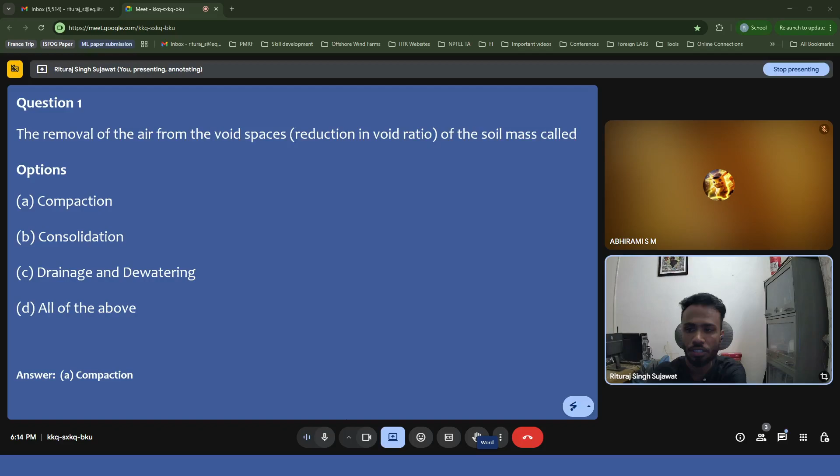This is the second question in front of you. If you don't have anything to discuss concerning the first question, let's start with the second question. Due to the compaction of the soil, which particular process is associated?

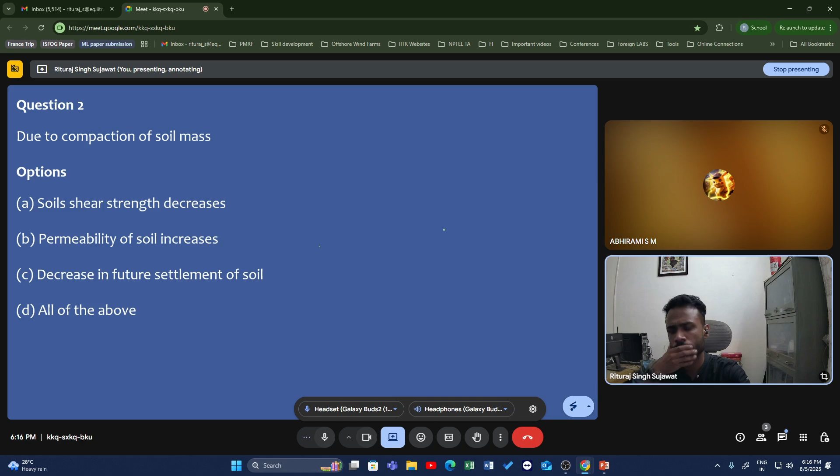So let's check the answer. The answer is C, that is, the decrease in the future settlement of the soil. Let's see how it works. When you have a particular soil matrix, due to the compaction of the soil, you can observe there is a removal of the air voids from the soil matrix. So you can see there is a compression in the soil.

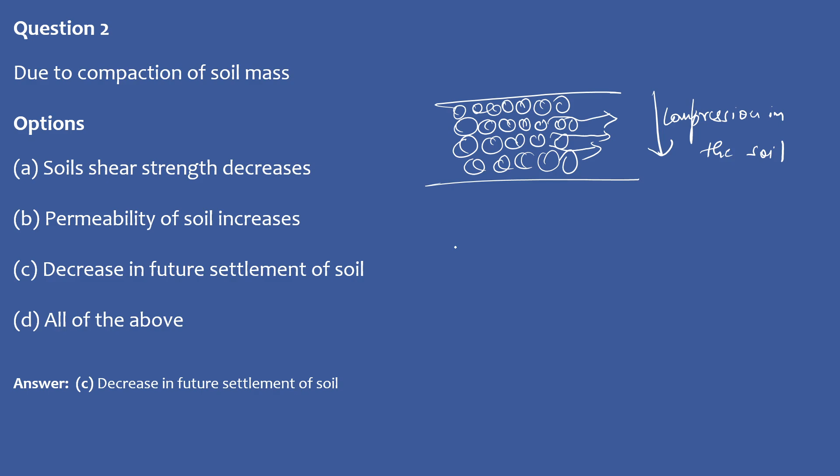Due to that compaction, whatever settlement needed to occur, the maximum of it has already happened. So you can observe there is a decrease in the future settlement of the soil, because whatever settlement was about to happen has already happened. So the correct answer is C, which is decrease in the future settlement of the soil.

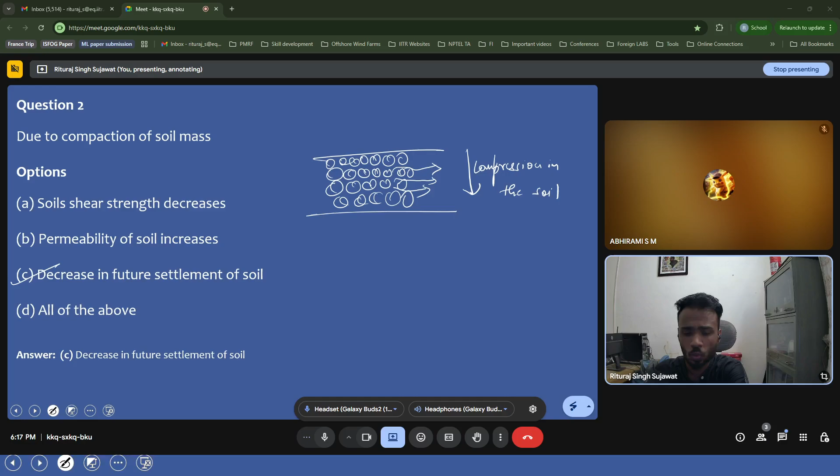Saturation is the essential condition for... So any doubt with question number 2? If not, then we can move to question number 3, which is: saturation is the essential condition for which of the given options.

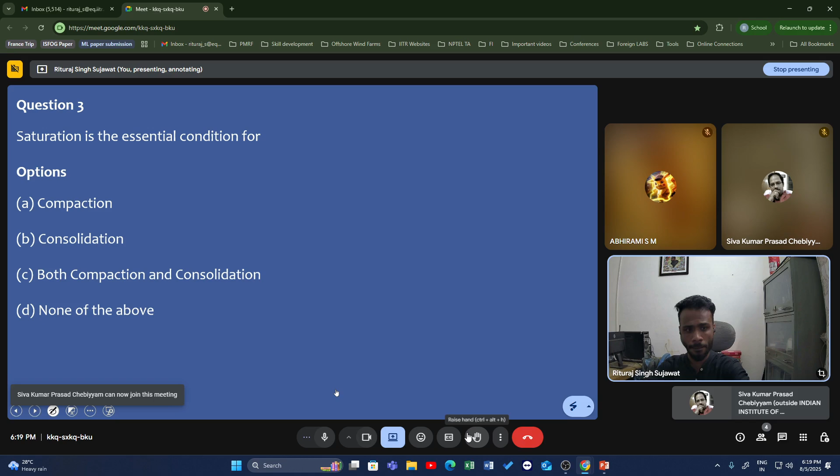So there is a question on the screen right now. You need to select one of the probable options. The question is, saturation is the essential condition for which particular phenomenon.

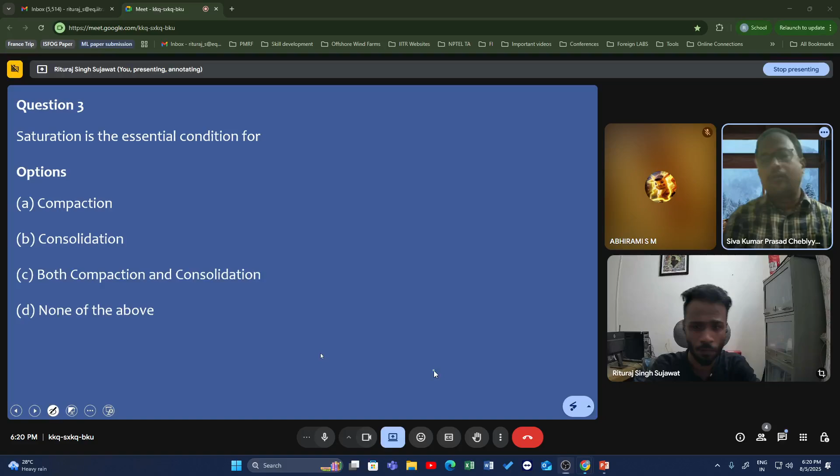So let's check the answer. Among all those four options, usually for compaction you don't require your soil to be saturated. Even if the soil is totally dry, you can go for the compaction process. But when there is water available in the voids, it corresponds to the consolidation phenomenon, which is basically the removal of the excess pore water pressure. So B, consolidation, is the answer.

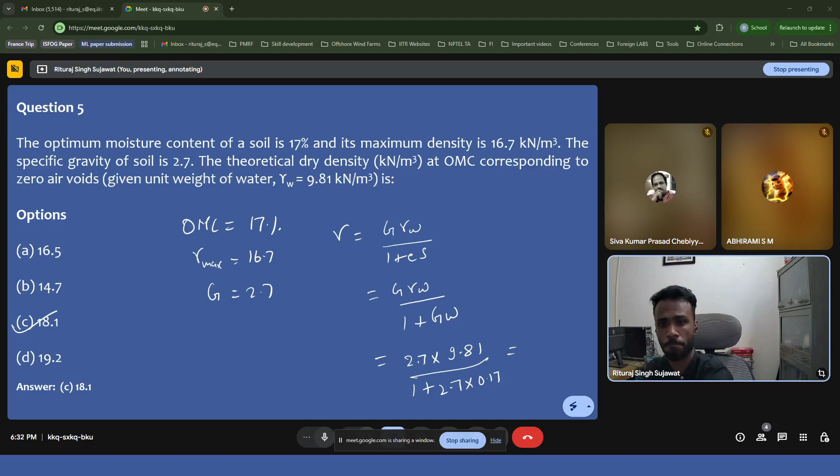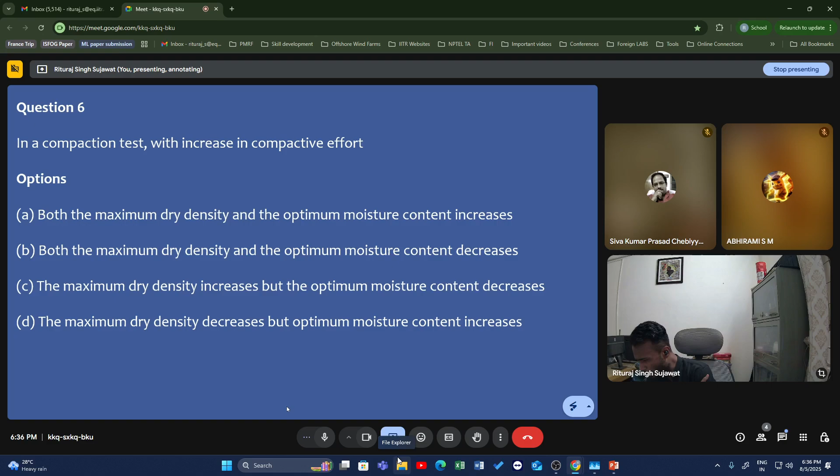So let's check the answer. Yeah, so the correct answer is option C. So let's see how it's working. So usually if we see the plot where we need to analyze how much compacting effort we need to make, on one axis you have the dry unit weight, and then you have 10, 12, 14, that will go up to 24. Okay, so this one is your optimum moisture content.

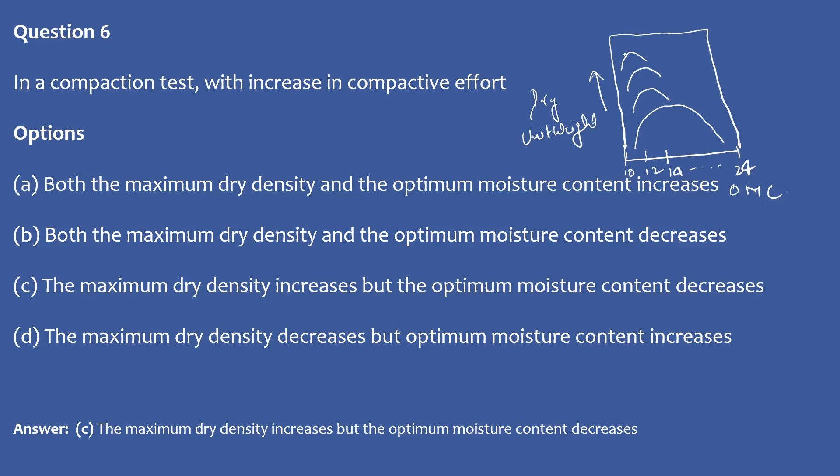So if we see, usually the plot between the dry unit weight and the moisture content is an inverse parabola, this inverse cup-shaped profile. So as you move upwards with the dry unit weight, you will see your compacting effort increases. As your soil becomes dense, that's how the nature of dry unit weight versus OMC will look. So you will observe that here there is an increase in the compacting effort because your soil is becoming more dense.

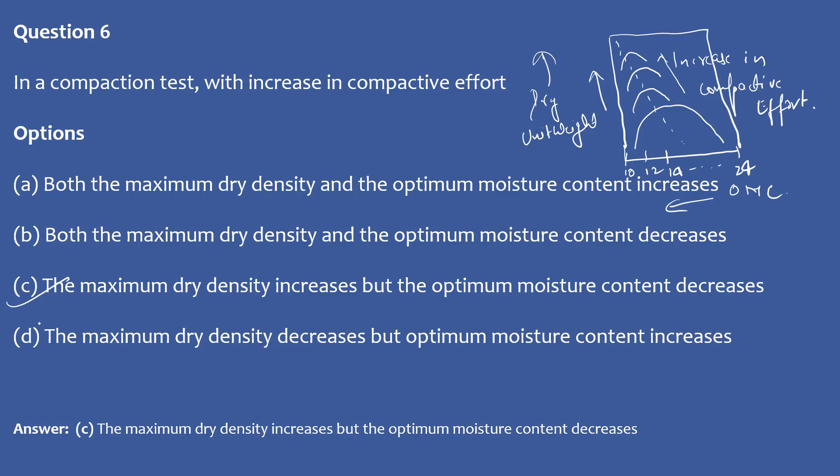So in this particular case, what we are basically observing is that with the increase in the compacting effort, your dry unit weight is increasing, but at the same time your optimum moisture content is decreasing, right? So that is how things are happening. So which option represents this trend? The maximum dry density increases but the optimum moisture content decreases. So option C corresponds to the correct answer.

Let's move to the next question. So question number 7. By the way, any doubt in this? Yeah, if not, then let's move to question number 7. So we have four different geomaterials which are compacted at the same compacting effort in the field. Which will represent the correct sequence in the increasing order of their maximum dry density?

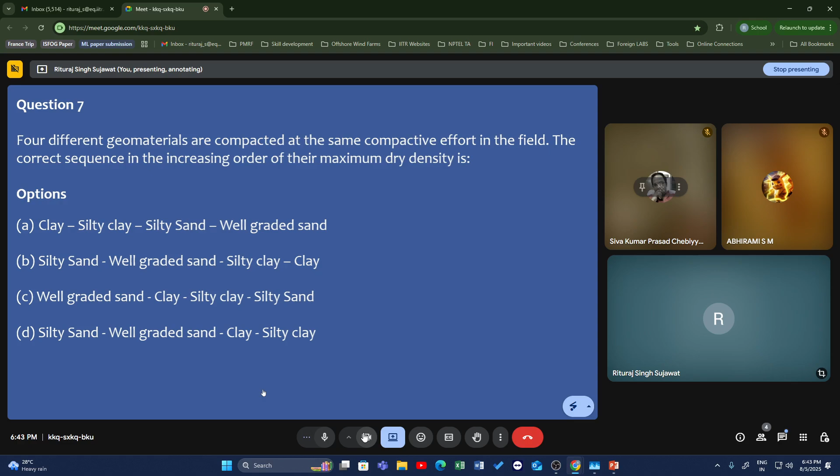Yeah, so let's check the answer. So the correct option is A. So let's check what you guys have given. Yeah. So yes. So let's check how it is.

So if we check all the four options, we have four types of geological material available with us. First is the clay, then you have a silty clay, then you have a silty sand, then you have a well graded sand.

So among all these four options, we can see that the well graded sand will have the densest packing, and that's why it will correspond to the higher maximum density. The next material is the silty sand; since you have a silt content, you can expect lower density as compared to the well graded sand,

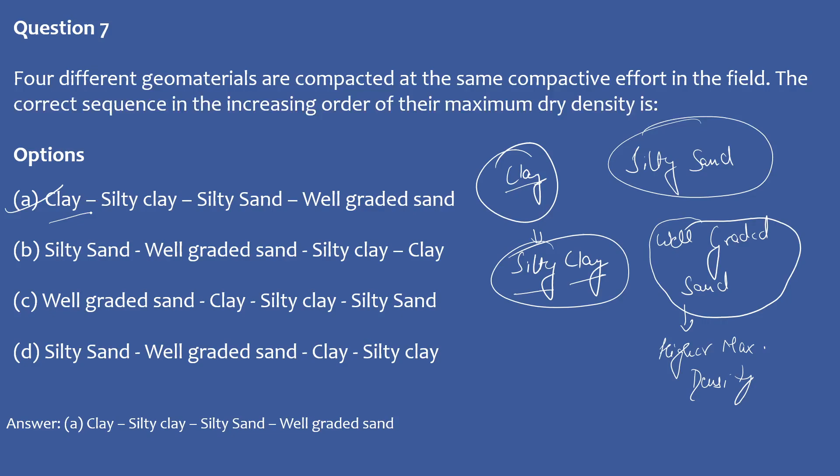So some of you have given this answer correct. So yeah, it's intuitive. So any discussion you guys want to have on this? If not, then let's move to the next question.

So you have been given four types of tests, and you need to determine which parameter each of those four tests corresponds to, whether it's penetration index, stiffness, moisture content, or density, and how they are linked with each other.

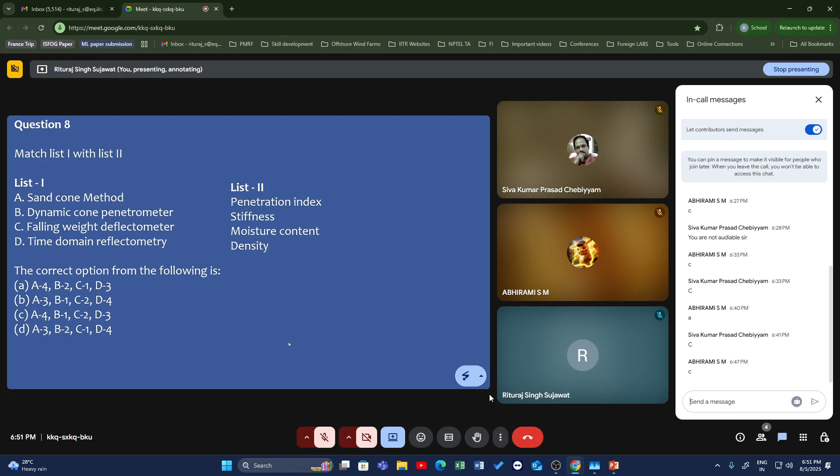Let's check the answer. Yeah, so the correct answer is option C.

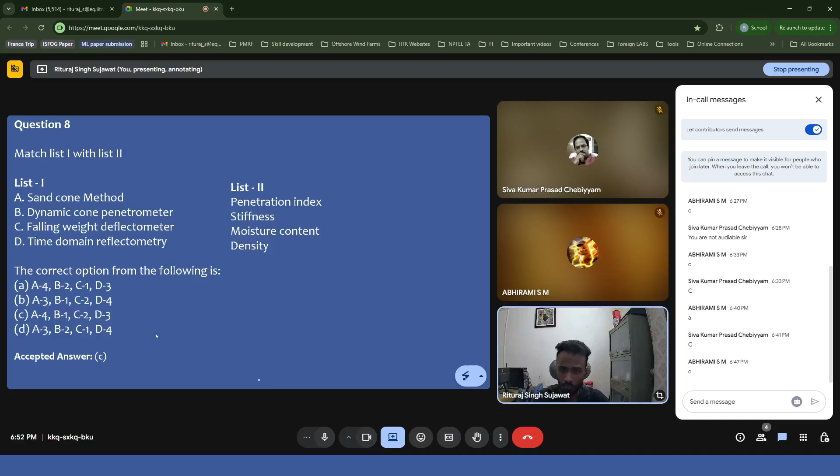Okay, I think it again got stuck.

Yeah, so the correct answer is option C. So let's check. The sand cone method is a very popular method to evaluate the in situ density of the soil. Usually you have a certain setup, and you take a known weight of sand sample in that particular flask, and then you take it to the site,

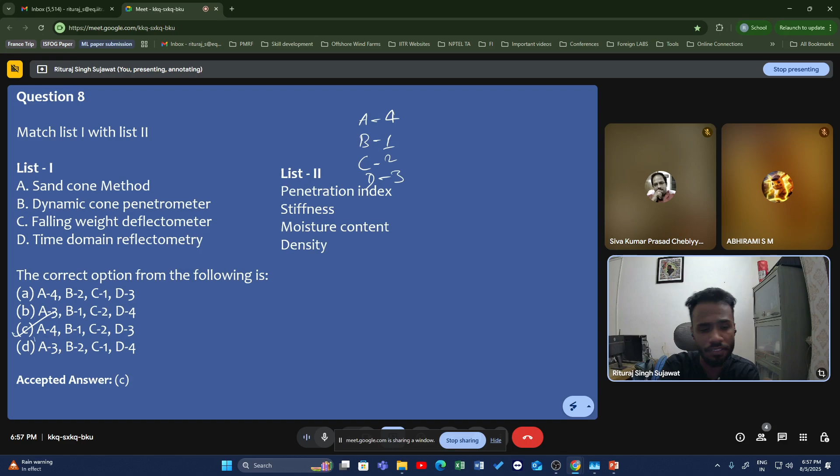Any doubt in this? You can check each and every method one by one. Some of them are widely used, and time domain reflectometry is based on the wave reflection phenomenon, where you allow a wave to pass through a particular soil medium, you calculate how much time is required to cover a particular length, then using that you calculate the velocity, and then you relate that velocity back to the dielectric constant of the soil, which will give you the moisture content.

So moving to question number 9, this is there in front of you. Soil has been compacted at the dry side of the optimum moisture content as compared to the wet side of the OMC. So you are having soil which is one at the dry side of OMC and one at the wet side of the OMC. So how will you relate the dry side and the wet side of the OMC with the shear strength?

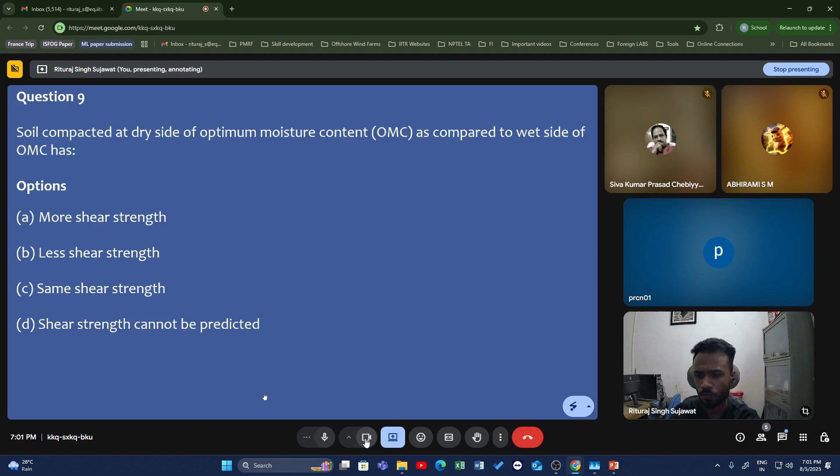Let's check the answer for this. So if we check, soil compacted at the dry side of the OMC as compared to the wet side of the OMC is having more shear strength. So you are having a dry density, and then there is an optimum moisture content. So if you take the plot of this, here basically your optimum moisture content lies.

So here is the moisture content. So this is your OMC. Here you will be having the wet side, and here you will be having the dry side. So definitely at the dry side you will be having less moisture available in the soil. At the dry side, you are having less water content available, and that will correspond to higher internal friction in the soil particles, and that's why it will lead to more shear strength.

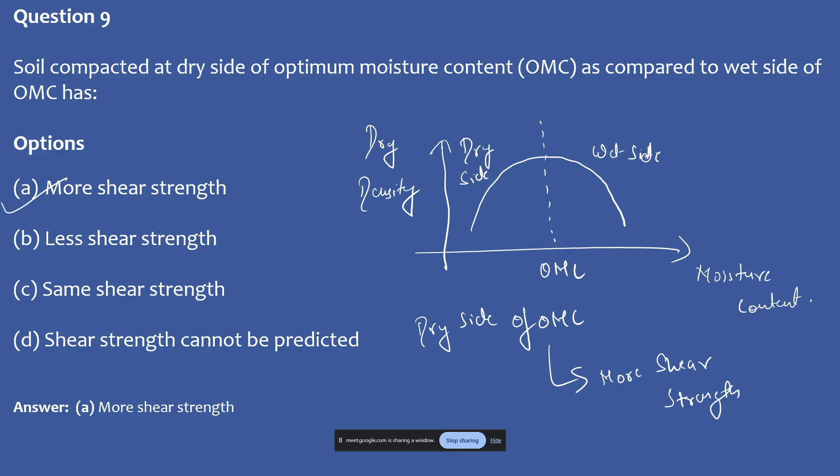Okay, then let's move to question number 10. The in situ void ratio of a granular soil deposit is 0.5. The maximum and minimum void ratios of the soil are determined to be 0.75 and 0.35. GS is 2.67, gamma W is 9.81 kN per meter cube. What is the relative compaction of the deposit? So the in situ void ratio, maximum and minimum void ratios, GS and gamma W are given to you.

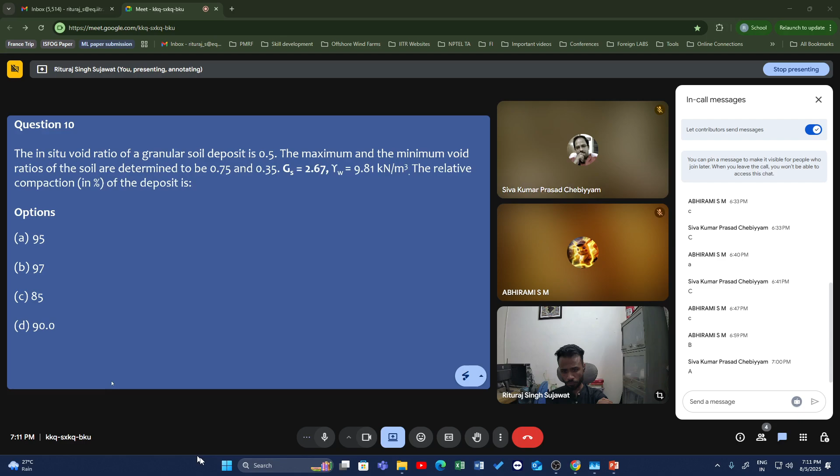So do we have any answers? Okay. Let's check the answer. So the correct answer is option D. Let's check with this. The in situ void ratio is 0.5. Your maximum void ratio is 0.75 and your minimum void ratio is 0.35. Your GS value is 2.67 and your gamma W is 9.81 kN per meter cube.

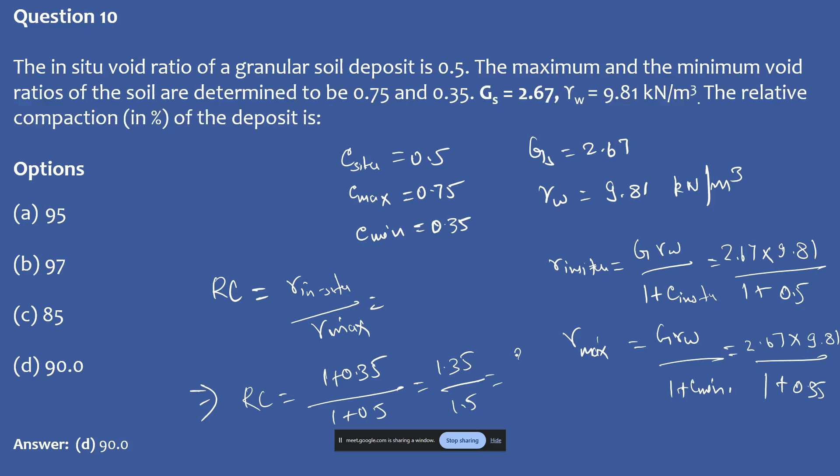So gamma in situ is G gamma W over 1 plus E in situ, and your gamma maximum corresponds to your E minimum. So 1 plus E minimum is 1.35 and your E in situ is 0.5. That's how you need to compare. So that will come out as 1.35 upon 1 plus 0.5, that is 1.35 to 1.5, which is 9 by 10, that is 0.9, basically 90%. So the correct answer is option D. The relative compaction of the deposit is 90%.

So that was the part. Any doubt in this, guys? So it's straightforward. You just need to know what the relative compaction formula is. So that's basically your ratio of the in situ density to your maximum density.

Your in situ density you can evaluate using G gamma W upon 1 plus E in situ, and your maximum density basically you evaluate using G gamma W upon 1 plus E minimum. You can take the ratio of both of them, and that will basically give you how much your relative compaction is, which is corresponding to your 90%. Any doubt in this, guys?

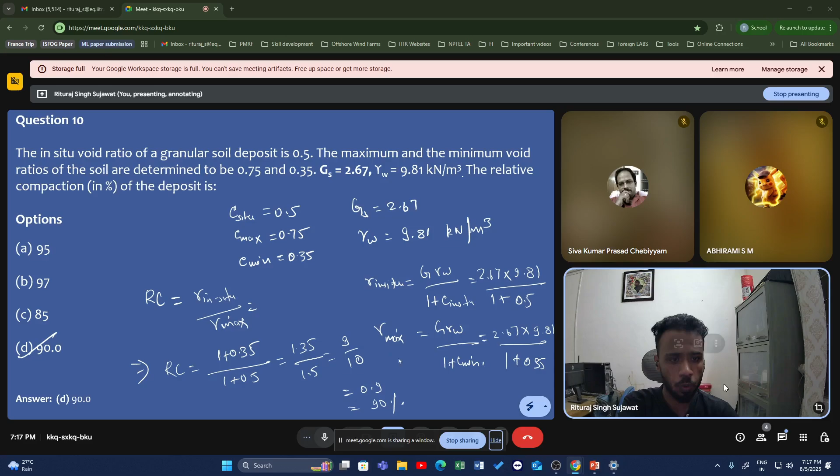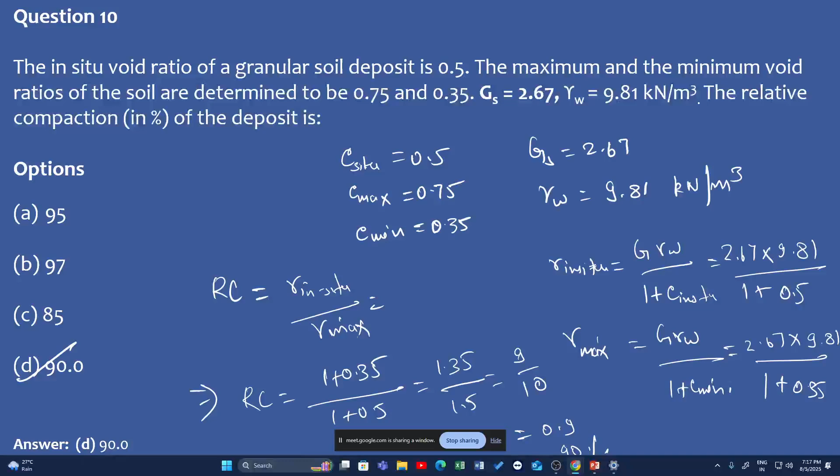So yeah, we did get some correct answers. Yeah, that was the gamma maximum. Thank you for pointing it out. And then let's move to question number 11 if you don't have any doubt in this. Yeah, so again that's a theoretical question in front of you. So where do we use the vibratory rollers for compacting?

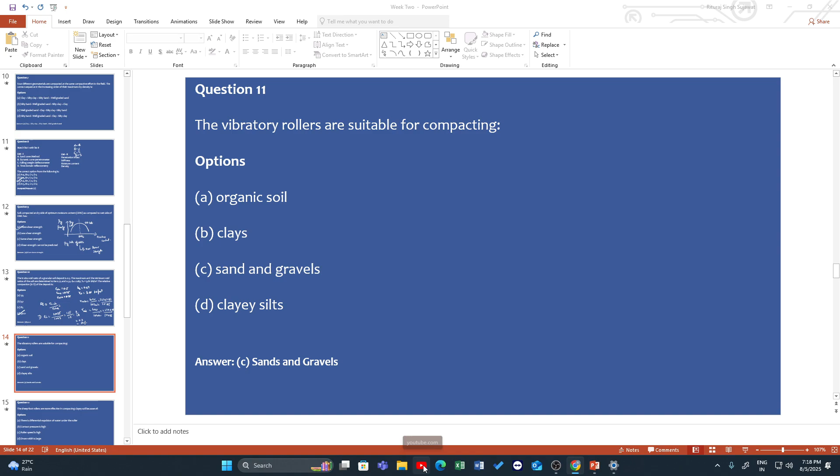So the vibratory rollers are suitable for compacting. So which type of soil will you suggest the vibratory rollers are used for?

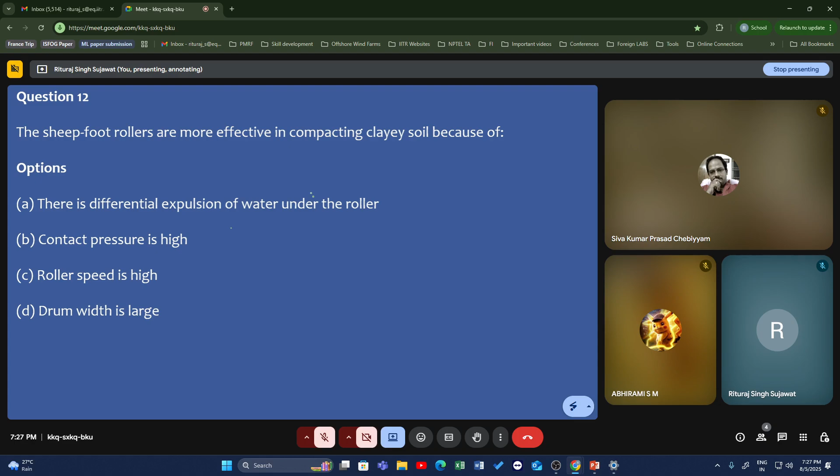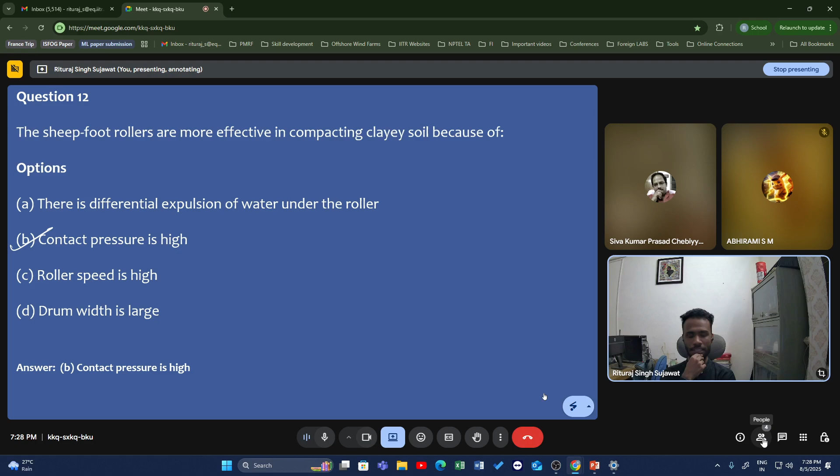So yeah, let's check the answer. So the correct answer is option B, which is that the contact pressure is high. Though the sheep foot rollers are more effective in compacting, is kneading action the same as contact pressure? So no, I meant to say is kneading action. Okay, kneading action. Yeah, so that's what we are saying here. So because of the smaller surface area and due to the more mass accumulated to those sections of the roller.

So yeah, when you are saying the sheep foot rollers, those needles which you are saying, that is relating to the contact pressure. So due to that, the contact pressure is high. Am I clear or not? So I think you are talking about the sheep foot rollers, where the rollers have some sections which are coming out of the rollers. So are you pointing to that, right?

The kneading action. It does have sheep foot like projections coming over. Yeah, yeah. They typically press it. Is that the same as the higher contact pressure? Yeah, so we are basically linking to that only. Yes, you're correct.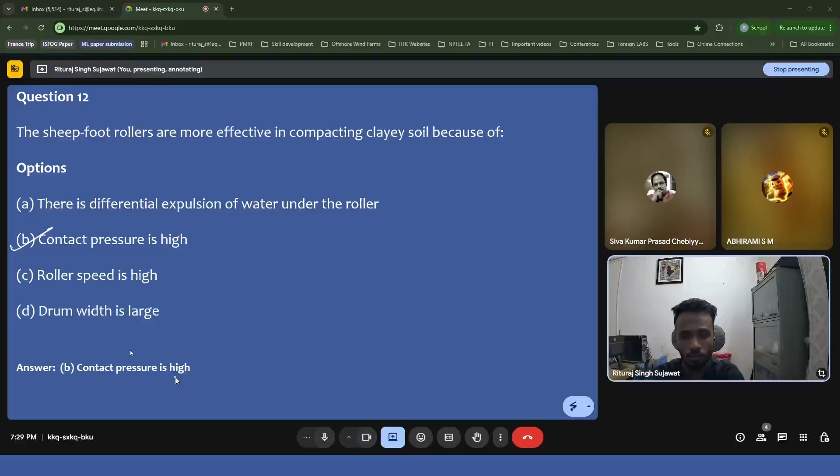Yeah, so due to that part, because if you would have seen the sheep foot rollers, there are some parts, sections which are coming out of the roller. So that's what we call the sheep foot roller, and that corresponds to the higher contact pressure. So yeah, the contact pressure is high, and that's why it's more effective in compacting clays. So yeah, that was question number 12.

And then let me present it again.

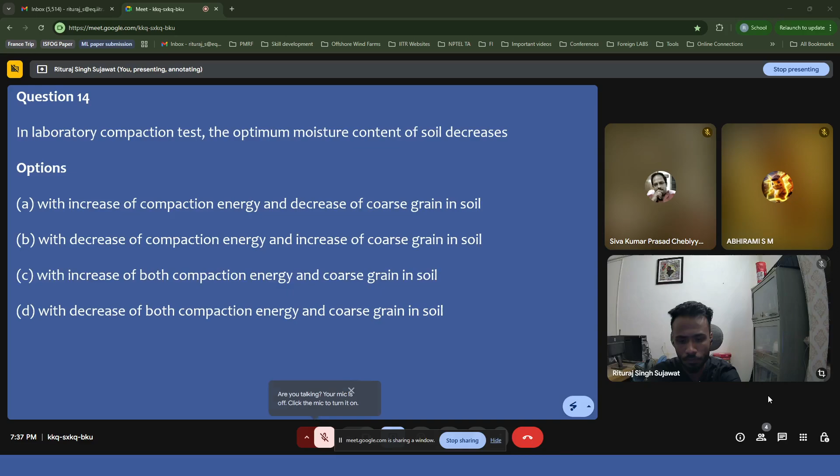So let's check the answer for this. Yeah, so the correct option is option C. Why so? So we know if there is a graph, you are having this optimum moisture content, water content, and then you are having the density. You are having the optimum moisture content here.

So with the less or dense soil, your OMC curve will happen something like this, right? So as the OMC is decreasing, there is this type of soil where the relative density is increasing. So here you can expect the grains can be coarser, as well as here you will be requiring more density.

So these curves, if we see how the trend flows, it basically moves away from the optimum moisture content. So here we can see the compaction energy is also increasing to densify the soil, as well as the grain also becomes coarser. So sorry, I think there's an issue with the option. So with the increase of both the compaction energy and the coarse grain, that is the decrease. Sorry. So the correct answer is option C. Any doubt in this?

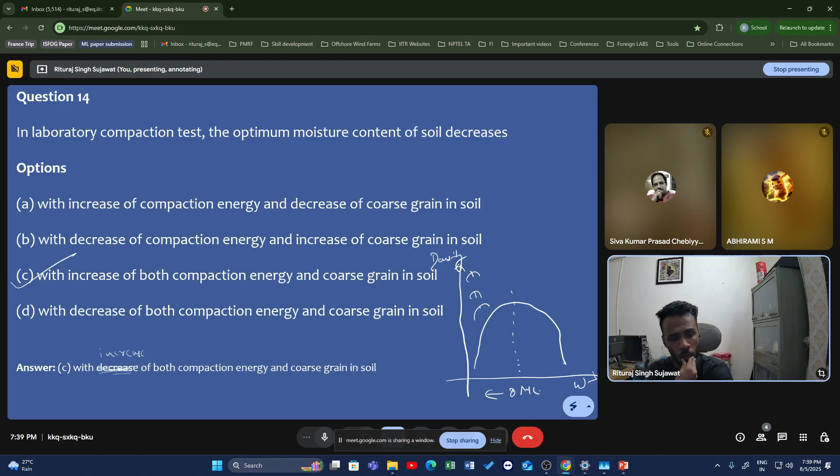If not, let's move to question number 15 to 16. So you are having a 1 meter wide square concrete footing which is designed to be embedded at a depth of 1 meter. The site has an 8 meter thick soft clay soil from the ground surface, underlain by a very dense sand layer. The groundwater table is at a depth of 0.5 meter.

The unit weight of the soil above the groundwater table is 19 kN per meter cube and below the groundwater table is 21 kN per meter cube. The column load applied to the footing is 161 kilonewton and the concrete unit weight is 24 kilonewton per meter cube. Assume the unit weight of water is 10 kilonewton per meter cube. What is the applied pressure at the base of the footing?

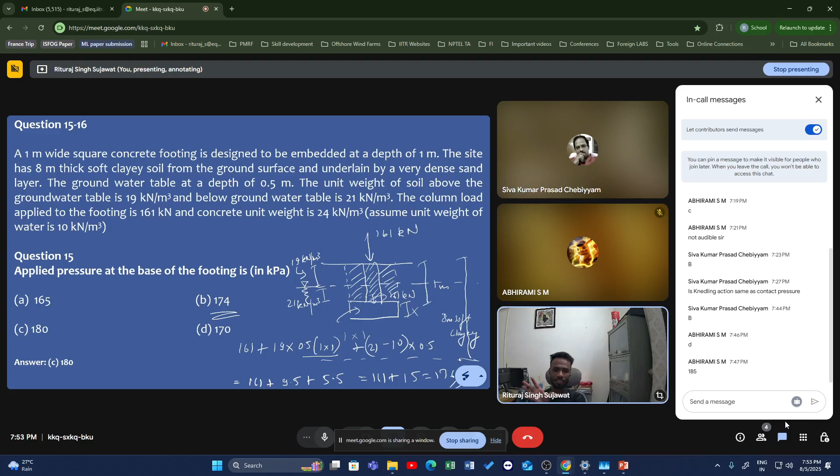Okay. Sir, actually, your approach is also correct, because the question is a bit vague. Yeah, yeah. So we don't have the clear indication. So again, it depends on the designer, what you will take into account. So okay, if that would have been theory, you need to mention the assumption, like since we are not considering the column self weight, and the thickness of the footing is very minimal such that its weight is not contributing. So you can then just take the overburden of the soil which is coming over the footing, as well as the 161 kilonewton column load which is coming from there.

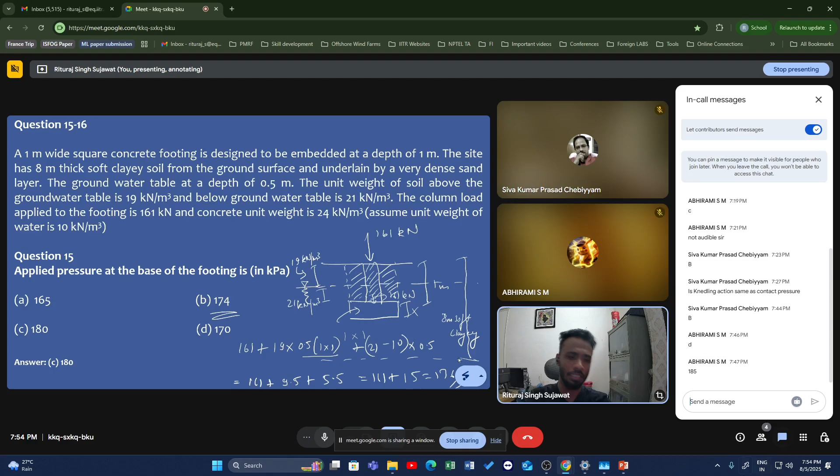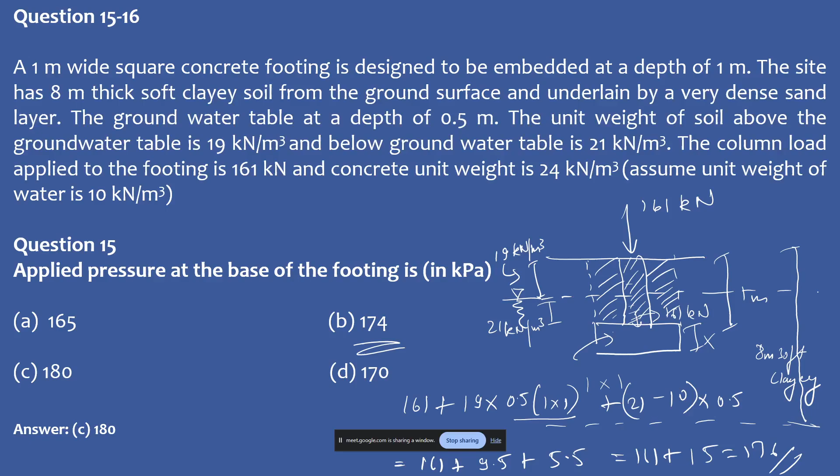So I think we can go with any of the approaches. Whatever you guys have considered can also be right. But yeah, we need to make the assumption, mark the assumption wherever we are solving this. So that's how we'll approach this question. It's having different ways. So let's skip 15 and 16 for the time being. It's also having the same thing, the effective overburden stress at the base of the footing. So you can calculate overburden stress, that's not a big deal. Then let's move to a different question.

Yeah, so here you can see you are having G, W, S, e represent the specific gravity, water content, degree of saturation and void ratio. If gamma W represents the unit weight of the water and gamma D represents the dry unit weight of the soil, then the equation of the zero air void line. So you need to represent how you will represent the equation of the zero air void line.

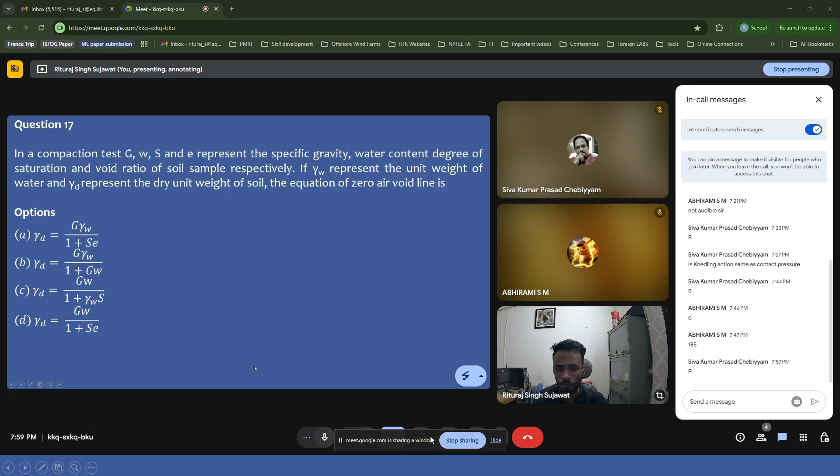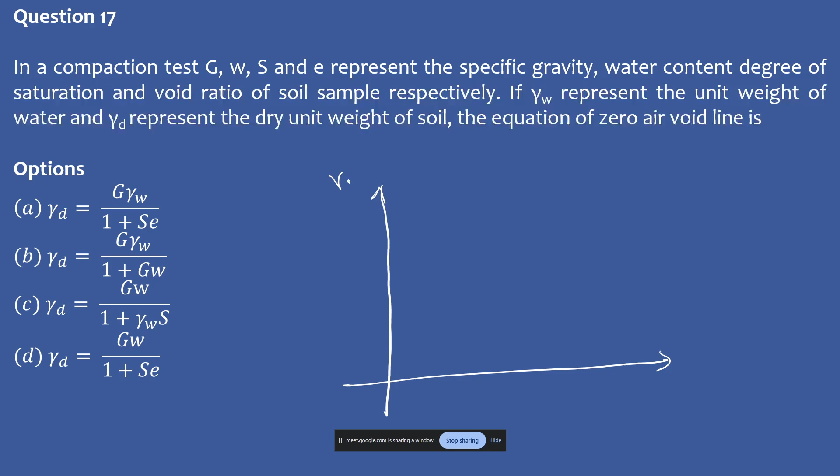Okay, so we are having gamma D, then you are having optimum moisture content. So usually, if we look into this, that's how your plot is, and your zero air void line will look something like this, and all the curves corresponding to the graph lie here. Now here you need to represent how you represent this line.

So usually for the dry density, you know, the formula is given by gamma d equals G gamma w upon 1 plus e, right? And for the zero air void line, there are zero air voids, so all the voids are filled with water. So in that case the soil is fully saturated, so your S is 1. So we know eS equals wG. Your S is 1, so e equals wG. So your dry density will then be represented by G gamma W upon 1 plus wG.

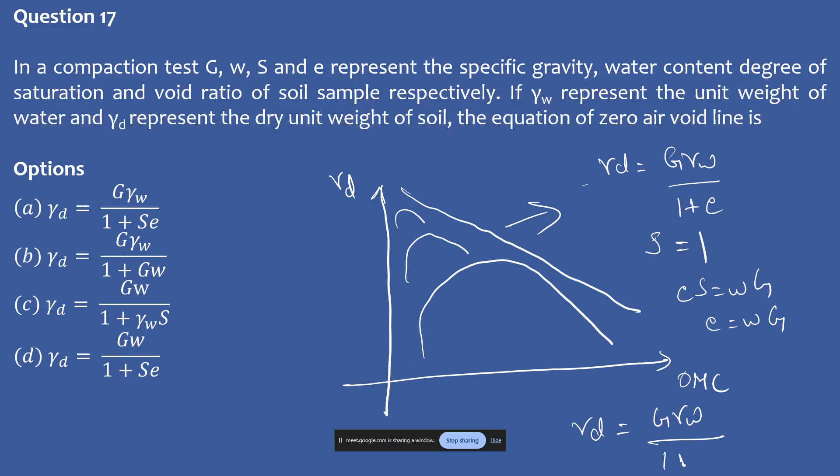So that's how your thing will look like. So the correct option is option B, G gamma W upon 1 plus wG. So question number 17 has the correct answer option B.

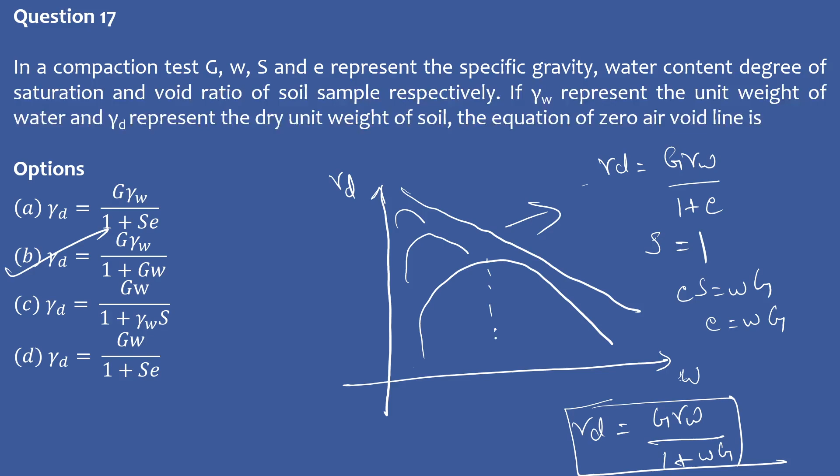Yeah, the x-axis is water content, right? Yeah, sorry. X-axis is water content, and this is the water content. Sorry for the writing. This is your water content, and then this is your optimum moisture content. I'm so sorry.